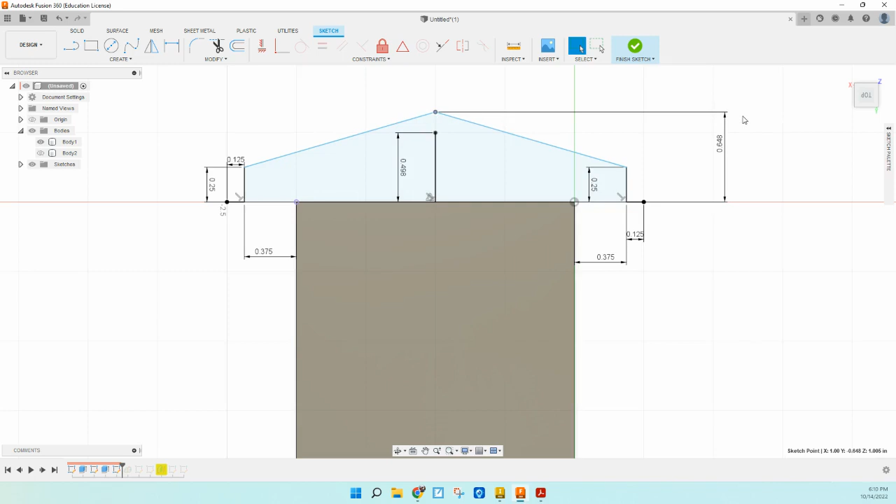So, 0.498, like that. Get this guy here and move it down. Let's get rid of that. There we go. Yeah, that was an issue.

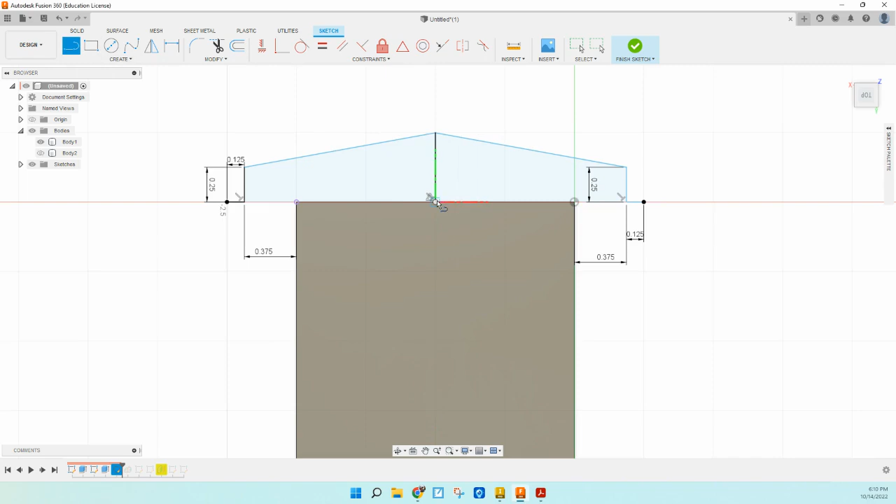All right, I'm also finding out that when we get the cattle catcher, we're only going to worry about one side of this thing. So right now, let's just save ourselves some effort, we're going to go ahead and just cut it in half.

So we're just going to make this piece right here all one nice little piece, and then we'll use this guy here to just clean it up, get rid of all that extra stuff. And I need this part, so go ahead and finish. And now we're going to...

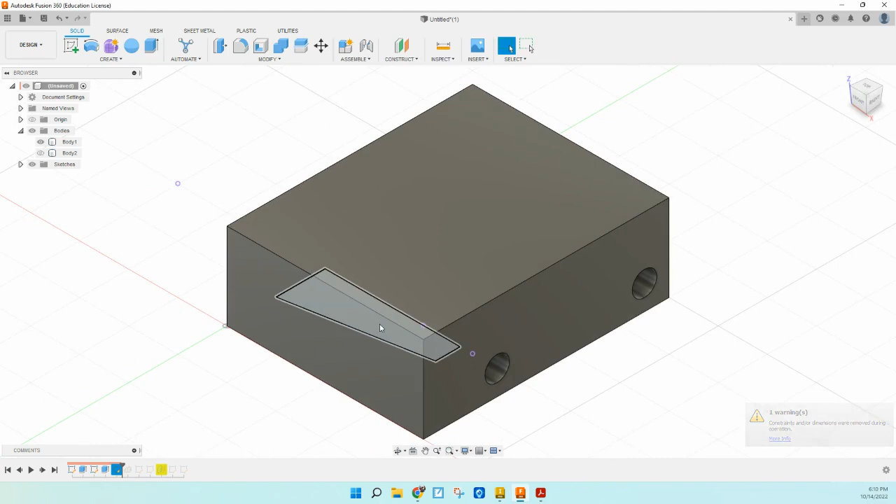Yeah, because we've got this piece here, right? Yeah, perfect. Okay, in fact we could probably cut this one in half too, but I don't think... yeah, let's go ahead and cut that one in half too. Yeah, sorry about the confusion, it is what it is, we'll just deal with it.

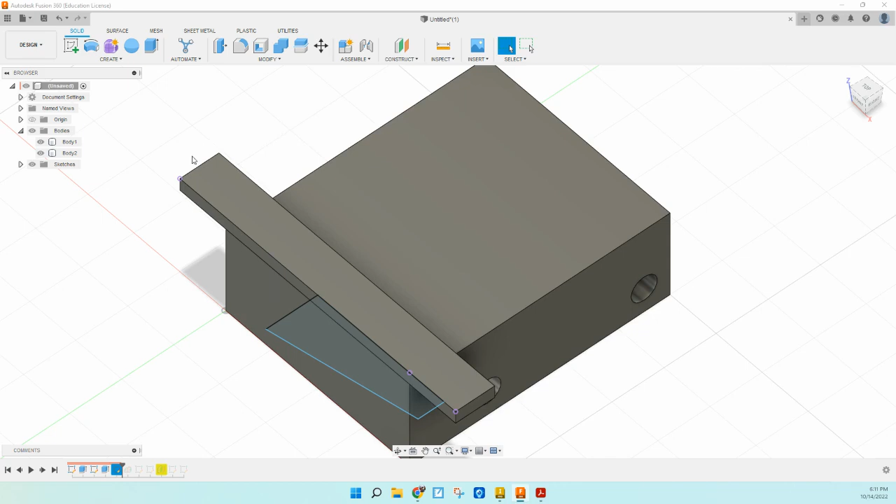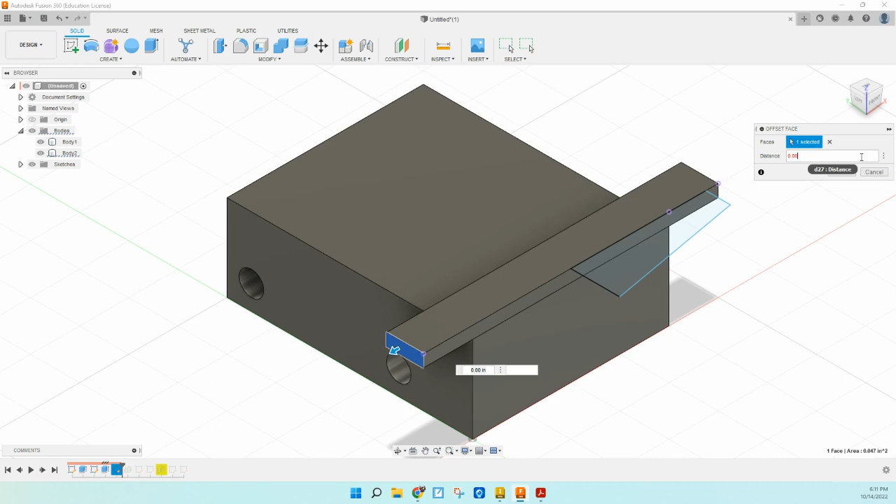So let's just see if I can do a quick fix on this one. We'll just offset this face, and we're going to go to... I can't do it. Let's have a 3... 1.5, no, 1.5, let's go minus.

Okay, so we're just going to cut that in half. We're only going to worry about this part, that'll make life so much easier. Now we'll go ahead and continue on with what we're doing.

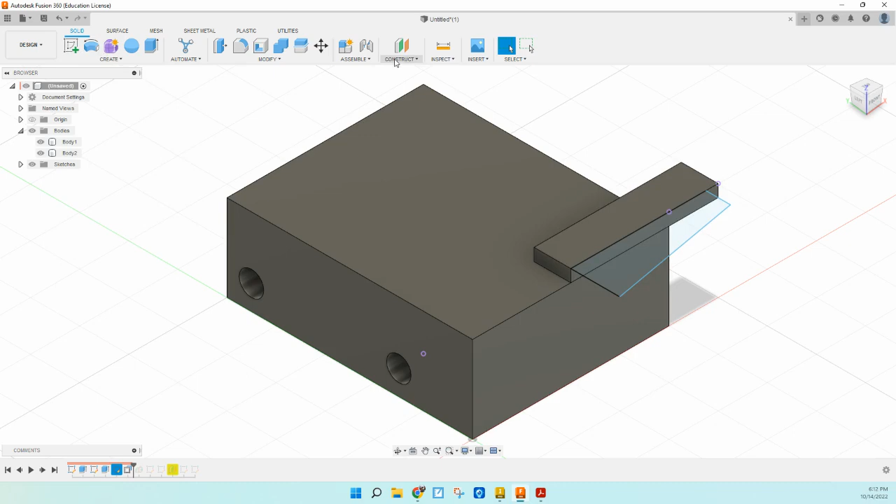All right, we've got this piece, now we need to do the one on the base. So what we'll do is we're going to use the mid-plane mode to establish a plane that's in the middle of this box. I'll go ahead and hide the body, the main trunk here, and then we'll go ahead and draw a triangle to give us some lead and direction where we're going to go.

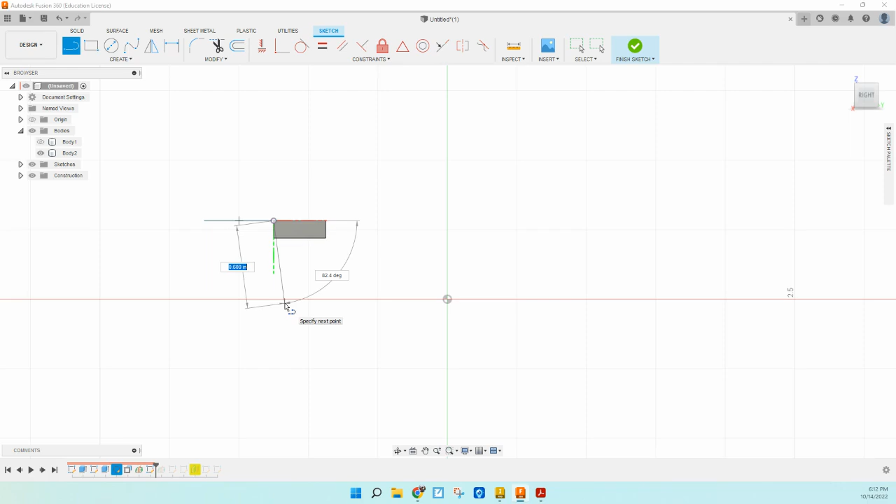So we're going to come from here, go straight down 1.255, and then we'll extend out 1.624 straight out. We'll go ahead and... yeah, that works. And then we'll go ahead, I'm not sure if we'll use this or not, but we'll go ahead and do this one too. There we go.

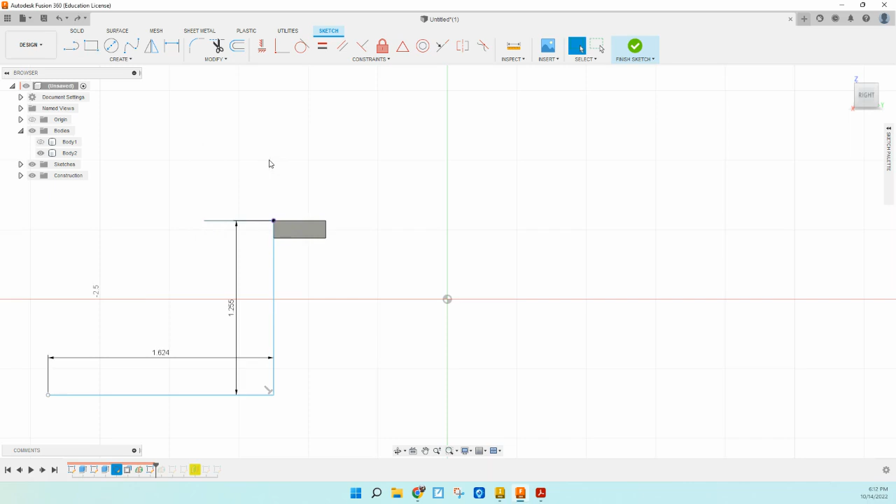And I should have... here we go. Okay, so we've got this one done.

Now, here we go. Let's go ahead and finish that part. It's just getting this down here.

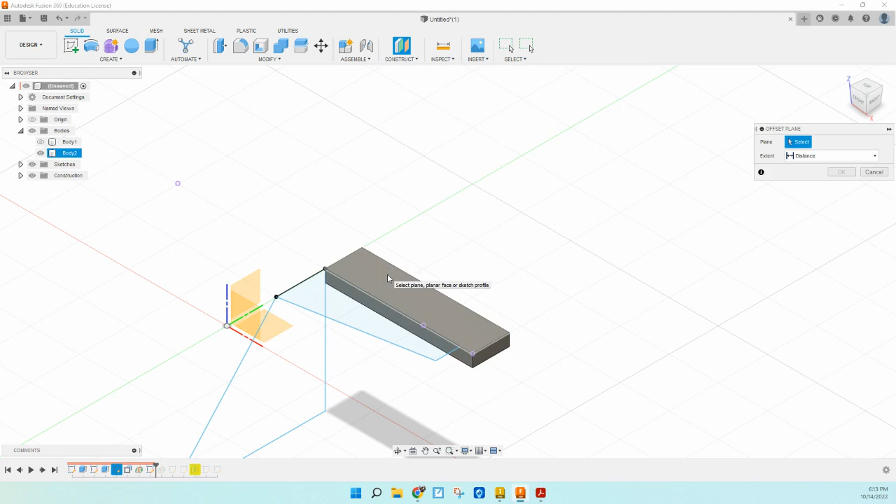Now we're going to construct a plane that's offset, and we want to go the distance that we just said. So we're going to go down 1.255. And we can verify that it's correct by clicking on the right side and see that it's lined up with it, perfectly right.

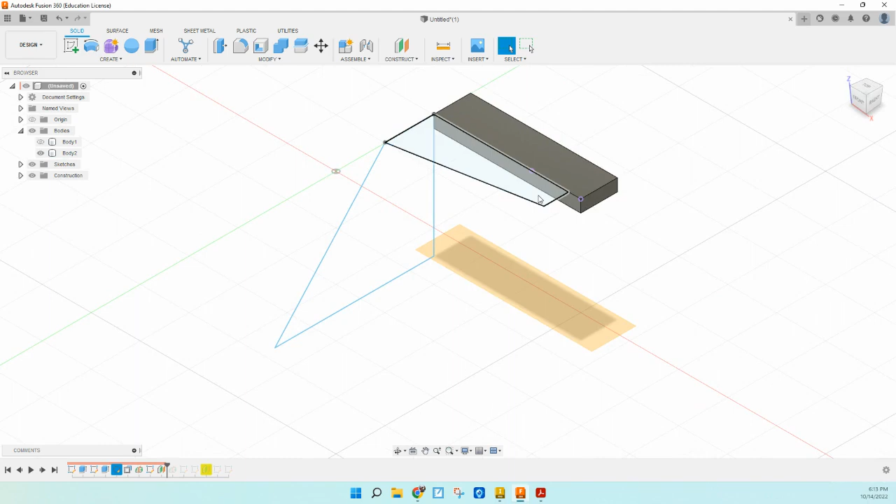Okay, and now let's go ahead and do some calculations here. We're going to go ahead and do a sketch on this path here. I want to go back to that view I had before, just to help us keep things straight.

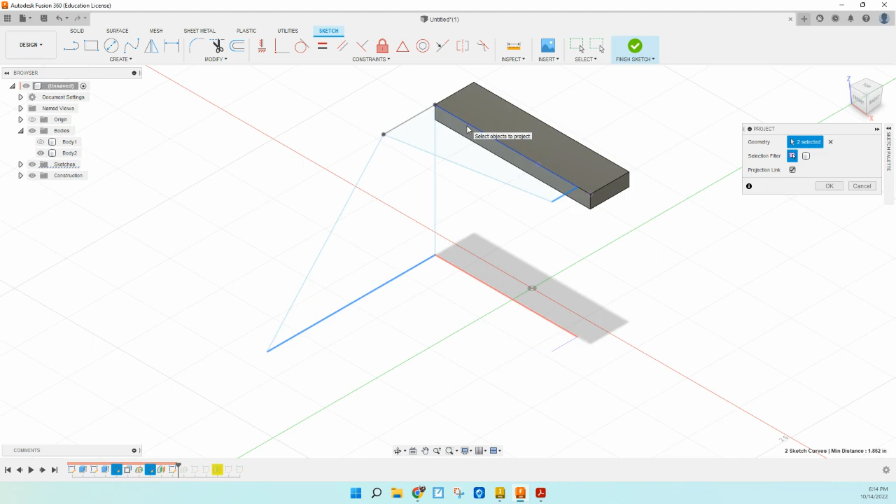And I want to project a couple of things here. I want to project this item down there below. I want to make sure that this line is projected so we have something to attach to. We need this line sent down so we know where to start from. And that should be good.

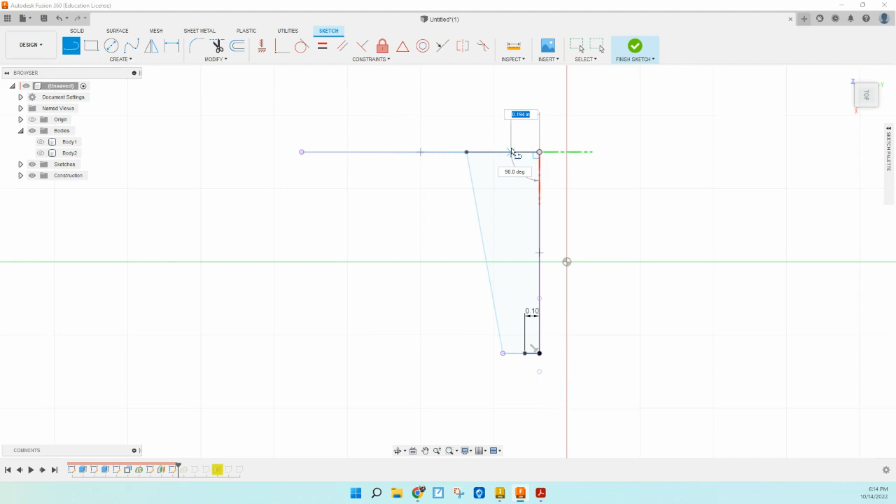We'll go ahead and hide that out of the way and go back to top view here. And now we'll go ahead and start here and go up about 0.1. That's where we want our cattle catcher to come out away from the train a little bit, 0.1 here. And now we'll draw a line straight across like this.

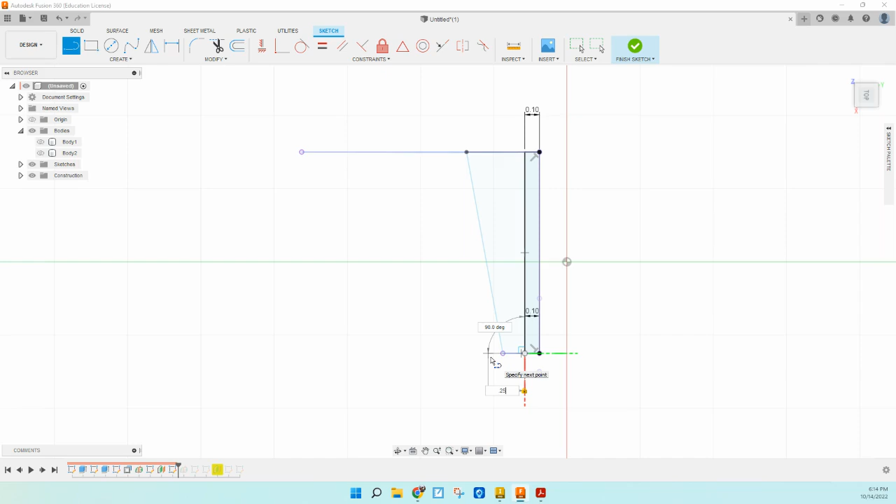Now let's go ahead and extend this line out. We'll go 0.25, that will be our base. That will work.

And then we want to draw this line from here to there, and then let's go ahead and finish it from here to there, so we have one good triangle. Finish it up, and we should have two triangles here and here.

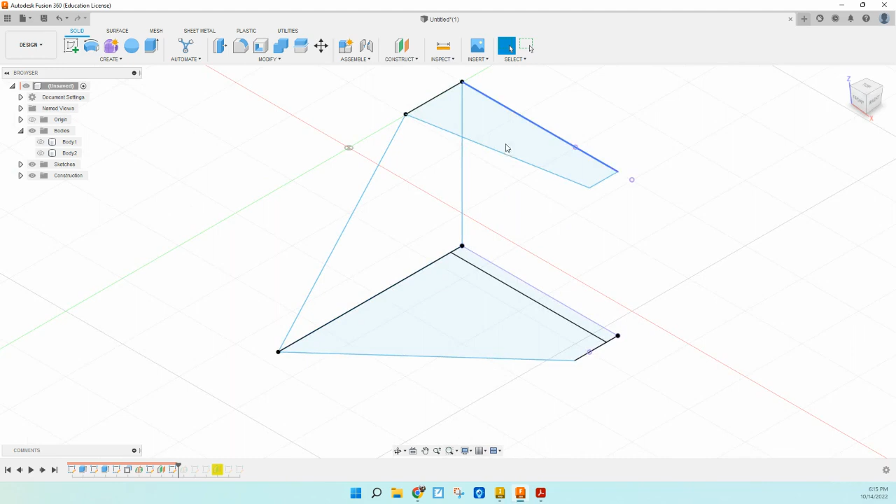Excellent. Now we'll go ahead and create a loft with a top triangle going to the bottom one, like that.

And then eventually we're going to rotate this around and things. Let's take a look and see what it's like with the bodies. We will join that on eventually, so they're all together. We'll have these bodies here.

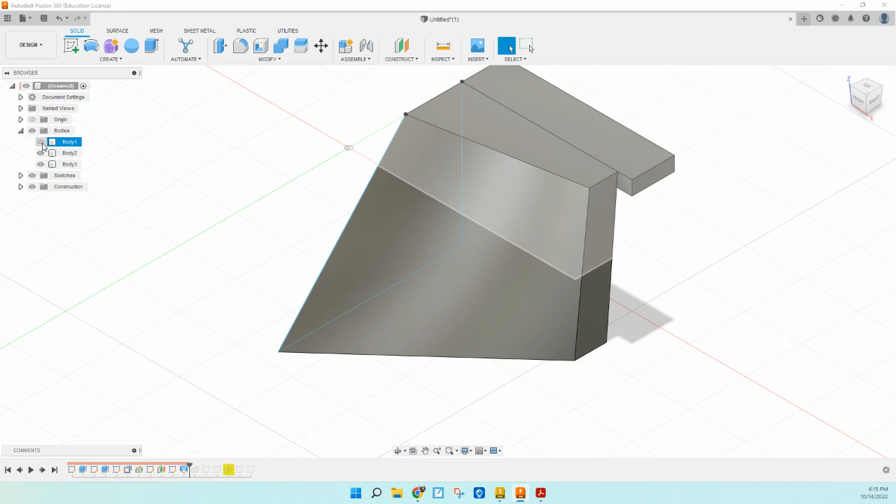Let's take a look at the right. Yeah, it does come away from it just like the thing. We might extend this one just a little bit later on, but that's okay. It's looking pretty good. It's looking really, really good.

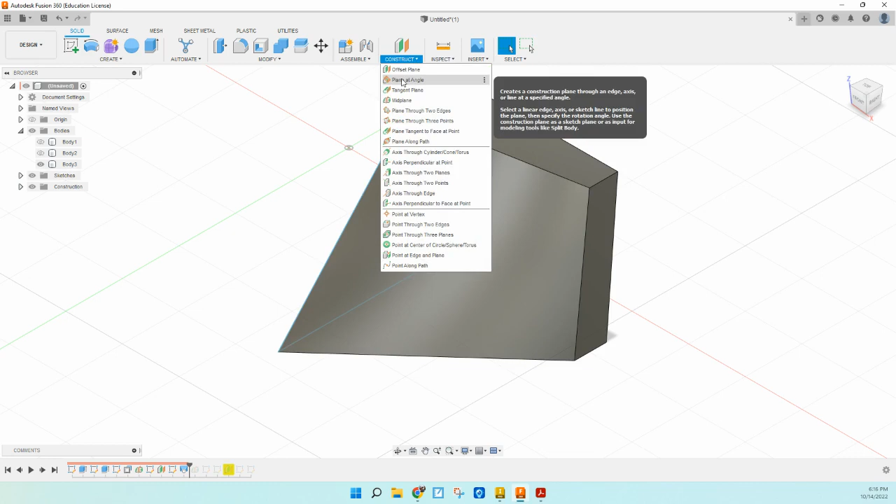Okay, now we have to confront the problem of drawing on a plane that's not really straight. So the tool we use for that is plane through two edges. We're going to define it by this edge and this edge.

We'll click OK. Now we have a plane that, when we click on sketch, it's going to go kind of at an angle. It's a little bit difficult to see. We just have to trust it that we're looking at it correctly.

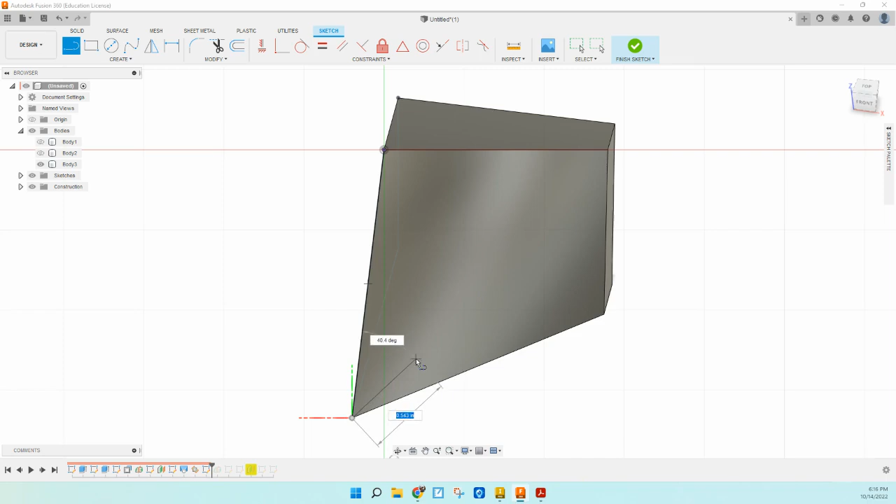Now we're going to draw a line real quick from here to the tip. Very good. We'll also need to project a plane right here while we're at it.

Let's project this bottom plane. We may as well do this one too. Not so much the one on the end. Okay.

Now, let's take and use this really cool tool. Like we did with the circular pattern with the tires, we're going to do a rectangular pattern here.

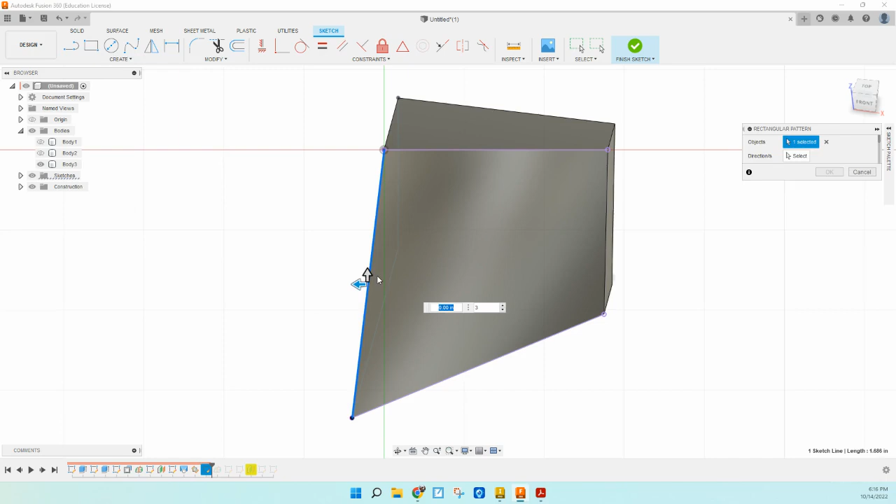Click on this part. We want to go in a negative direction, 1.4. That puts us out to the right, to the edge of this pattern. And then we're going to do 16 iterations. That seems to be the best. And then we just click OK.

Now, because we did the projection, you can see as I hover over, each of these little bodies show up nicely. We're not going to do the last one here because we want the front cattle catcher to be nice and thick. So let's just make sure it worked before we go on.

We may have to undo it and go. So if we select this one and that one, let's see, I'm going to go ahead and just do shift, just to make sure that it's working, that we had the right count. Come down here to the end. Yeah, that's going to be perfect.

Okay, so we want to skip that first one, go here, right? Down here like this. Just double checking again. I know you guys watched the video, but there you go.

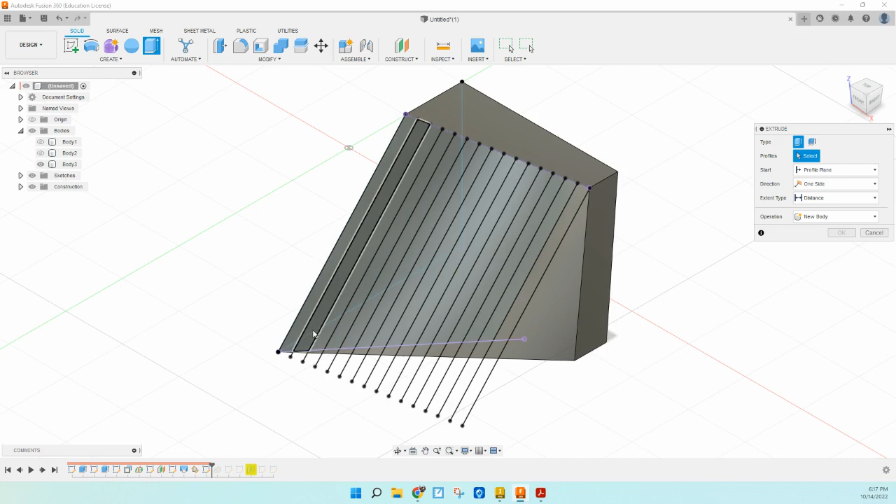Okay, so we're going to go ahead and finish the sketch. And now we'll do an extrusion. Now, as I remember, we're going to skip this one, right? 1, 2, 3, 4, 5.

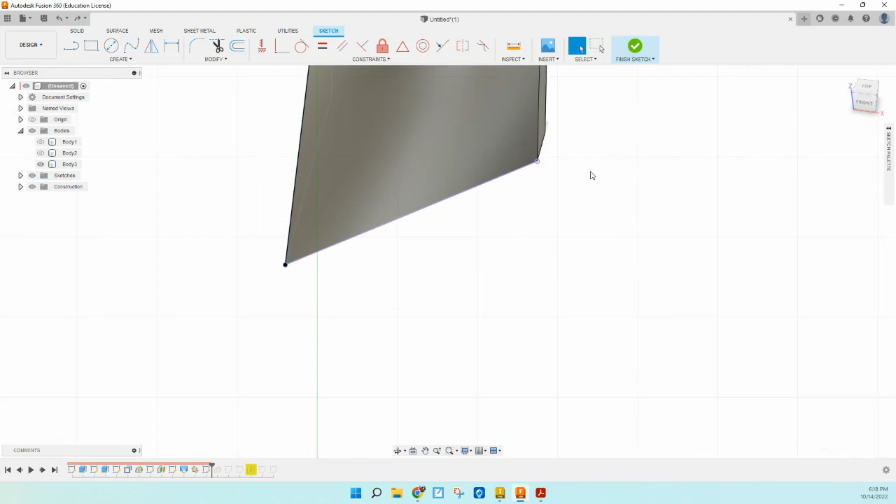Oh yeah, it is a problem, isn't it? Darn, okay, we have to back up then. Undo, undo, let's do that again. Yeah, I should have checked.

Looks like we're going to have to go a little bit more. Let's try going 17. Okay, so we're going to go back to here, choose the rectangular pattern, click on this guy right here, go negative 1.4, and then let's try 17. And now that should do it.

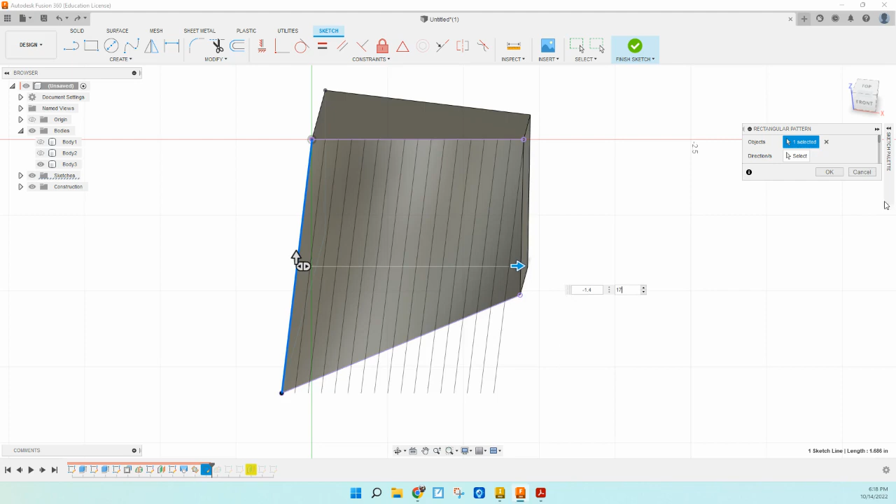Not too bad to go back. I think I need to project this one here. That's why it wasn't doing it before. Okay, let's go ahead and finish the sketch.

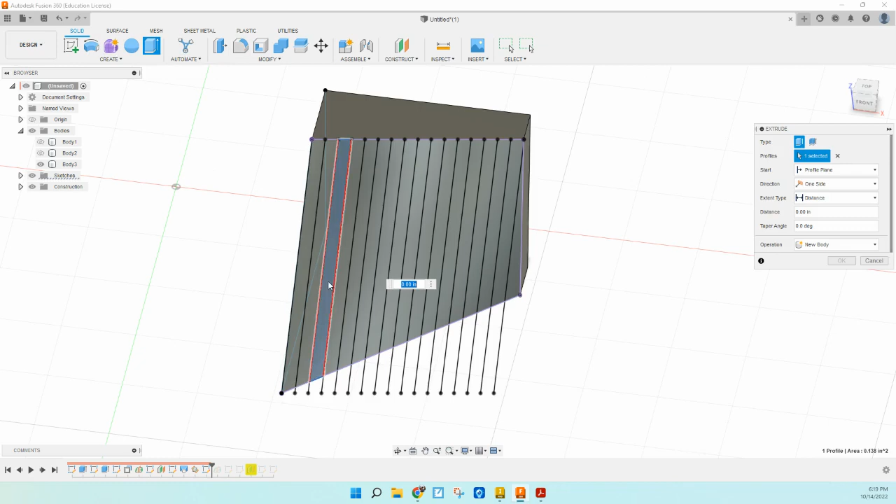Now we'll go ahead and do the extrusion, skipping one, then go 1, 2, 3, 4, 5, 6, 7. Oh, perfect, absolutely perfect. Now, let's go back to the back here.

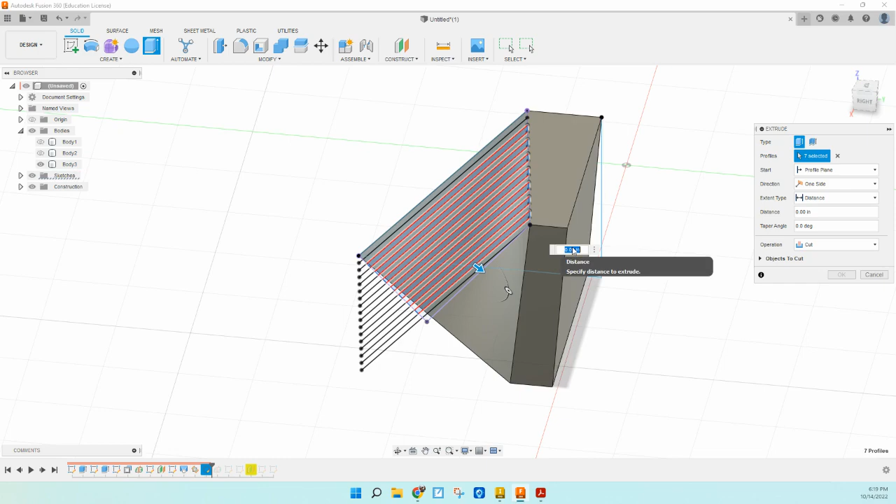We're going to see what we could do, and this is really cool. I'm going to show the bodies here so you can see what's happening. If I were just to do a cut like this, and we give this thing a distance of like 2 inches, it goes zipping through there. It's really kind of cool looking, right?

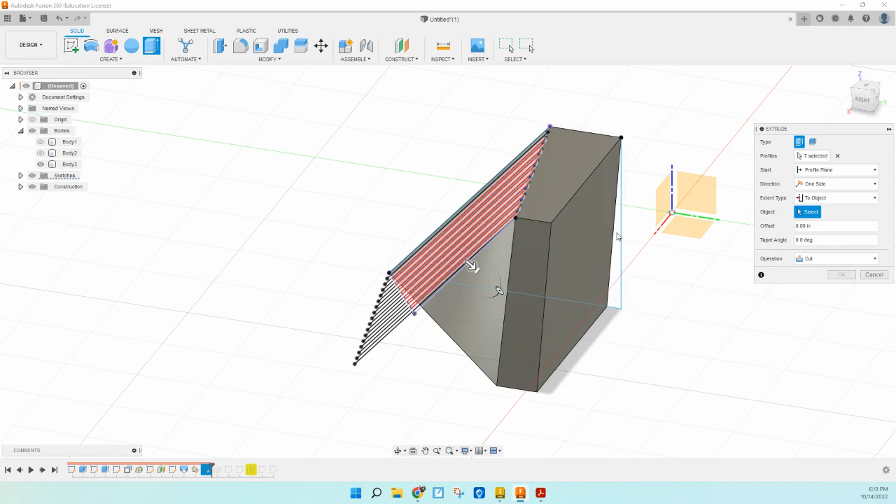If I had the bodies right here, it would also cut into these bodies. So a really cool feature, and I want to turn these off because I don't want them to become part of the body, is instead of doing distance, do to object, and then we just do to the back of the object like this. And it cuts to, but not any farther than that object. So now we have this really cool cattle guard on one side.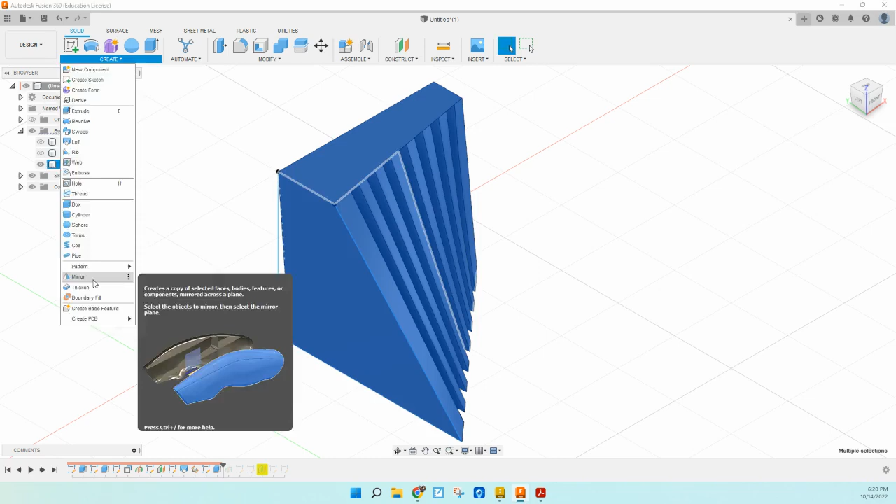And now we're going to put the other side. Makes it really straightforward. Okay, so here's what we do. We're going to come on to the other side here and choose in 3D mode. We're going to choose modify, create, mirror, and just make sure that it's not faces, but it's set to bodies. And then choose the mirror plane to be this one right here. Click OK. There it is, join. And that's a pretty good looking cattle catcher.

Now, let's go ahead and show the second body here. And I wasn't sure I was going to do that or not, so I guess I didn't need to make that in half. Sorry about the confusion.

Well, let's go ahead now and extend this guy back, the 1.5 that we took it out. Right here, just 1.5. And then what we're going to do is extend that side just a little bit, I think. Even though, yeah, we'll do just a touch because we want to bring this face into the cattle catcher to make it all one thing. Just a touch though.

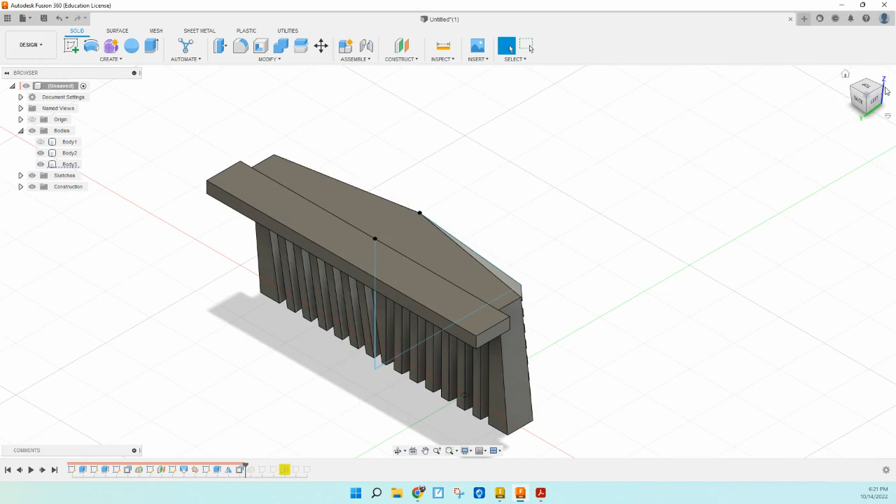Okay, so we'll use the face, offset face again. This time we're going to just go 0.05. That's probably too much, let's go back to 0.03, just a skosh like that. Now, if we look around, we can see that we've mended it and tidied it really nicely. It's all going to weld really well.

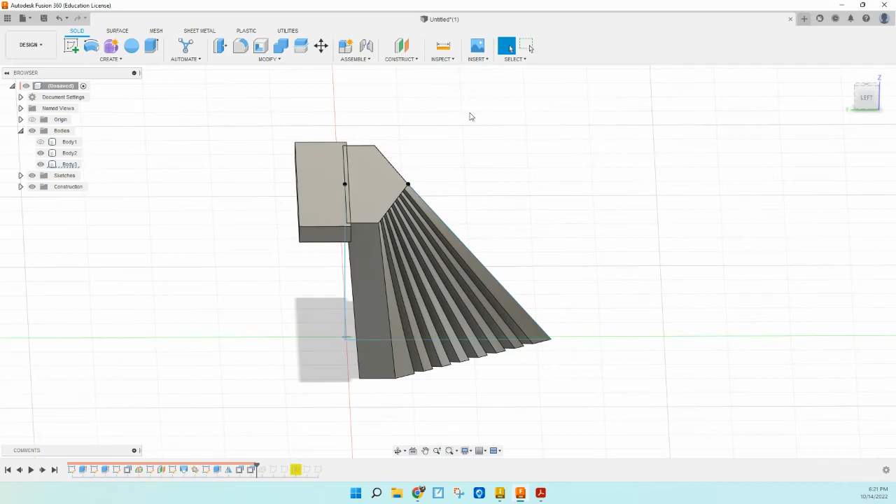So let's take this guy here, and remember at 0.03, we're going to undo what we did on the edge here in just a moment. So we'll go ahead and make this all one object like that. Now, just to fix that little problem that we did, I'm just going to come in here and adjust this face.

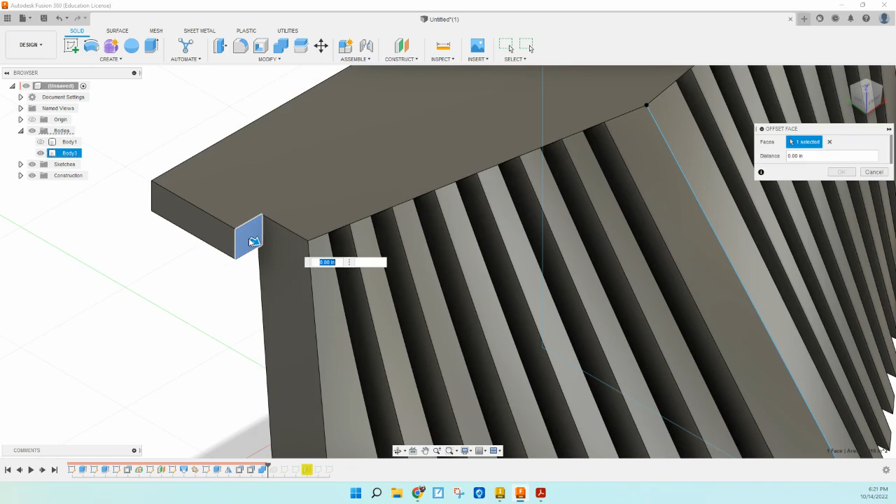Offset it back 0.03 so that we're true to the drawing. You can offset this face as well, negative 0.03, and then we've got it.

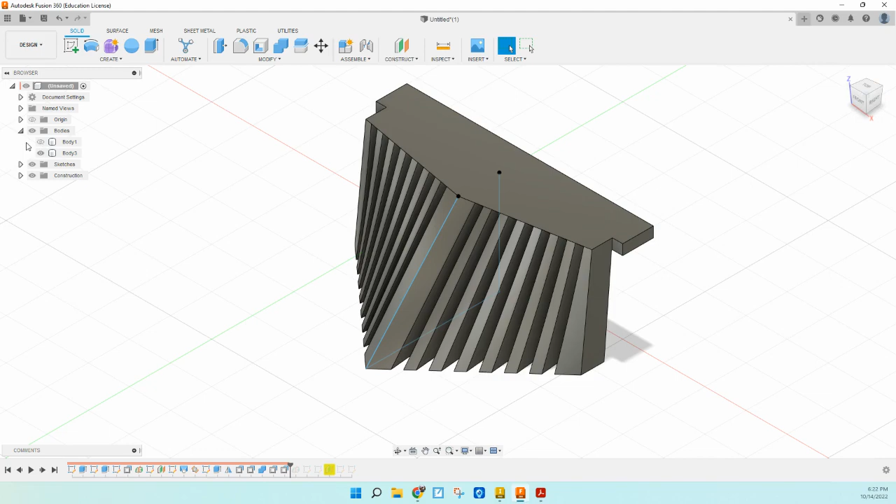Okay, so that was the hardest part of the whole cattle catcher. I'm going to go ahead and pause the video at this point and let you go ahead and work on the rest. So at this point we're at the cattle catcher and the box that goes with it. Eventually we'll make that one part as well, but it's looking pretty good. It's looking really close to what the instructions have us do. At this point we're going to add lights and whatnot.